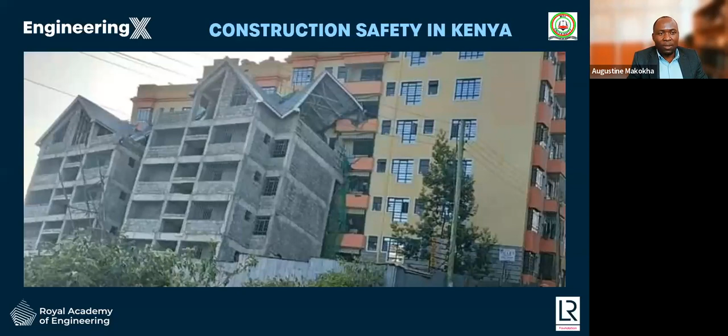Briefly, the goal of the Safety Champions in Engineering Education program is first to build capacity in terms of skills and knowledge to ensure that we have a sector which is safe, and we are targeting students, engineering students, who will become future professionals designing, maintaining, and operating our infrastructures in the industry. We are also looking at the practicing professionals, engineers, mainly for the purpose of upskilling them and reskilling them so that they're able to implement safe engineering practices in the construction industry.

And secondly, we are also trying to enhance safety awareness by advocating for enforcement of standards in the industry, and we are doing this through outreach programs. So we hope that through this, we should be able to reduce the number of accidents and fatalities that occur in our engineering construction industry.

Just to have a kind of context of this, we try to get some data from the industry to be able to understand the context of the challenge or the problem.

Looking at the growth rate, we realized that construction is one of the fastest growing sectors, having recorded about 6.3% rate of growth in the first quarter of 2024. In terms of the GDP, the sector contributed 7.1% to the GDP, and it employs approximately 400,000 people, out of which around 135,000 are skilled. The remaining are semi-skilled and unskilled.

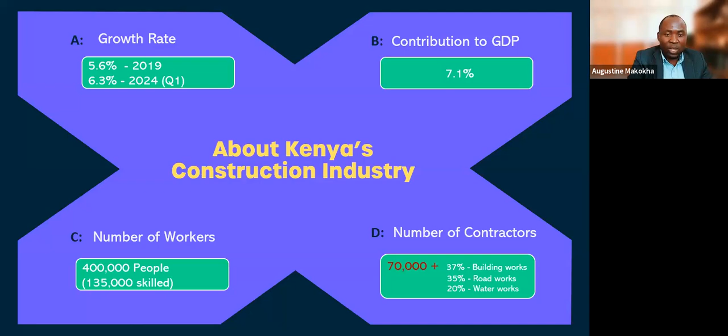The remaining about 8% are the ones in mechanical and electrical works. We also looked at the capacity in terms of the professionals that we have, and we realized that this sector is served by a range of professionals. We have engineers, architects, quantity surveyors, and physical planners, totaling about 5,000 professionals collectively.

If I look at just engineers, we have about 2,000 engineers expected to serve 70,000 plus contractors, assuming all these engineers are working in the construction sector. That translates to 1 engineer for every 35 contractors. You can see that already we are really under capacity in terms of our professionals.

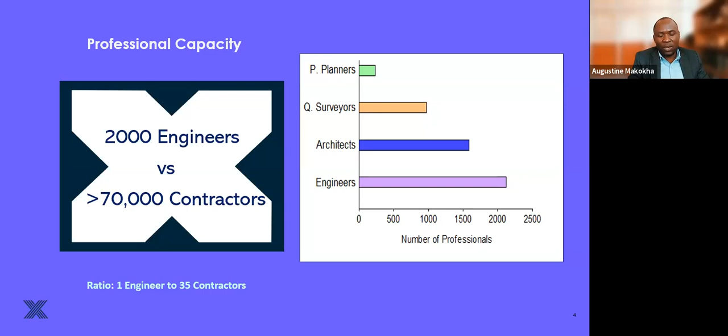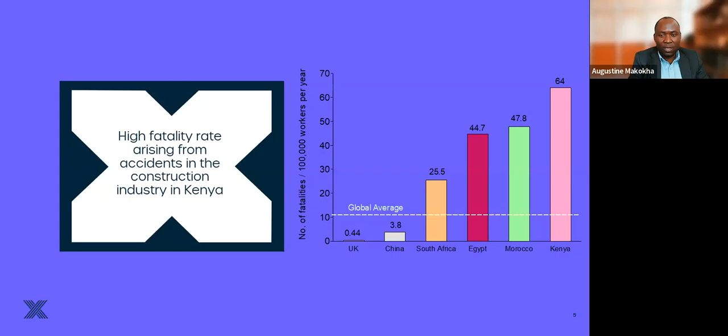This could also be a contributing factor to the low safety performance we are witnessing in our construction industry. If we look at the statistics on fatalities, Kenya has a very high rate, about 64 fatalities per 100,000 workers per year. That's higher compared to neighboring African countries like Morocco, Egypt, South Africa, and way above the global average of about 10.3. So we still need to do more to bring down this number.

We also know that safety is not only confined to the construction stage, it extends even to the stages after construction. As we can see from this data, safety risk is actually very varied.

Out of 14,895 buildings that were inspected in 2021 by the National Building Inspectorate, only 24% were declared safe. That means the remaining about 76% are actually unsafe.

And that is during the building as well as after the construction stage. We also observed that the number of buildings that collapsed during the same year were actually more after completion than during construction. That implies that even the building where you are seated, you have to be sure whether it's one of those that are safe or not, because 8 in 10 buildings are actually unsafe. That's what the statistics is telling us, and it implies that safety is really a very varied kind of risk, which can occur in many forms.

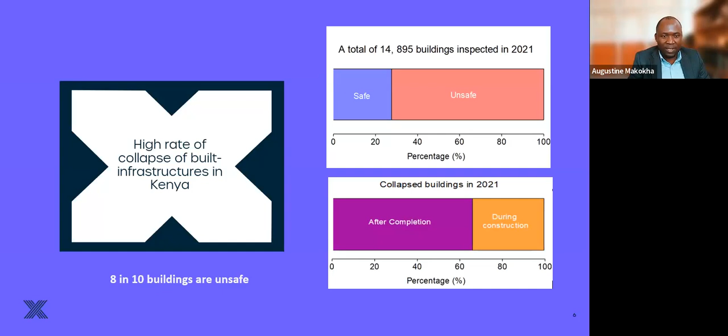Just to reiterate this, we looked at some case points to demonstrate how varied the risk is. The first case point relates to a building in Nairobi, and I think most Kenyans have seen this. This is a building that was sinking, or was partially sinking, due to some issues with the design of the foundation. We can attribute this to failure to observe building codes and standards, and maybe also non-involvement of qualified professionals in the design and supervision of some of these projects.

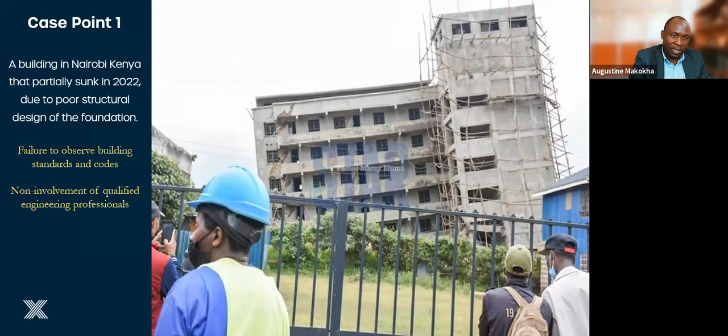The second case point relates to a bridge which collapsed in Kajiado in 2022. This occurred just 1 week after commissioning, and the reason is attributable to design deficiency of the bridge.

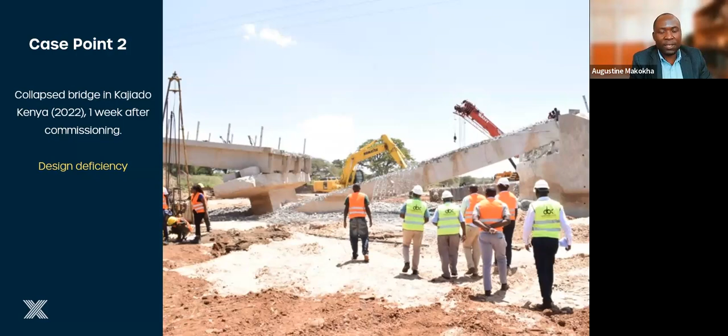The last case point relates to a construction supervisor or boss who actually fell and died while supervising or inspecting a building. We see that there was failure by the contractor to provide safe access to the construction site, which is an issue with non-compliance.

So we learn a few lessons from this. One is that safety runs all through the entire stages of the project. It's an integrated aspect in what we normally look at as a systems approach, where safety should be considered as an integral part of the entire project. Two, in terms of safety responsibilities, all the duty holders in a project should have a responsibility for safety.

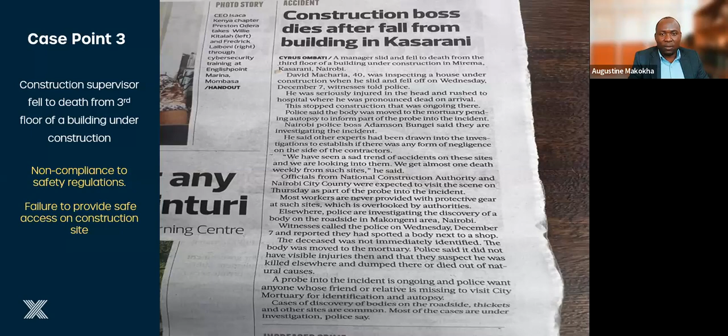Having said that, let's try to understand who is involved in ensuring that the people, the infrastructure, the environment is safe, that regulations are enforced, and that safety is improved. First of all, we have the government, which has a duty to monitor, control the quality, approve and ensure that planning is as per the standards. They do this through a number of agencies: the National Construction Authority, NEMA, DOSH, and KEBS.

All these agencies are supposed to assist the government to ensure that our infrastructure, our people, and our environment is safe as far as construction is concerned.

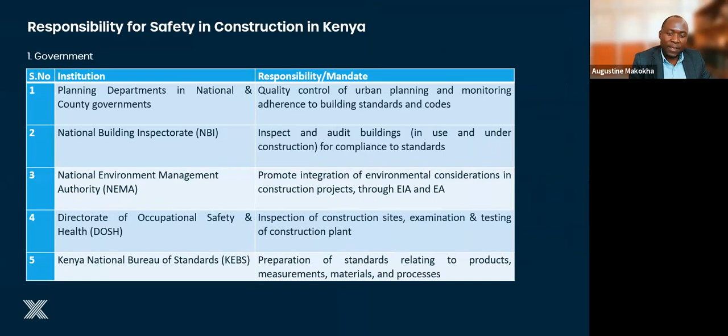The second stakeholder here is professional bodies and training institutions. Professional bodies have a duty to regulate the professionals practicing in the construction industry. Of course, they provide licensing. They also ensure that standards are adhered to, and they are supposed to contribute towards development of some of these standards and ensure that professionals uphold professional practice.

We also have universities and colleges who have a duty to train young engineers or young professionals who will be taking up these responsibilities in the future as professionals in the industry to design, to implement, to manage some of these projects. By doing so, they are supposed to be well qualified to do this in a safe manner.

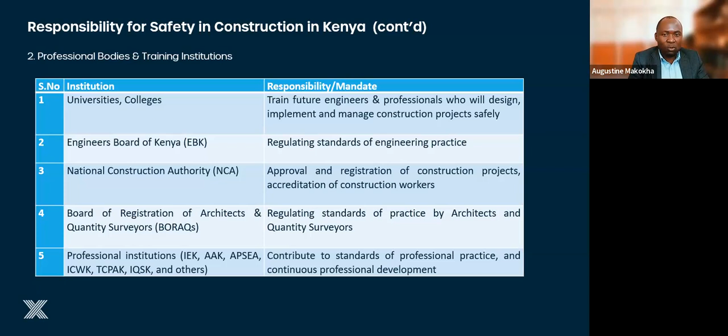We also have the industry. Of course, they have a duty in terms of compliance. They are supposed to comply to the regulations. We have the employer, who is supposed to provide the relevant information that will help the contractor come up with a safety management plan. And also we have the community that has a duty to create awareness and ensure that members in the community are sensitized about safety.

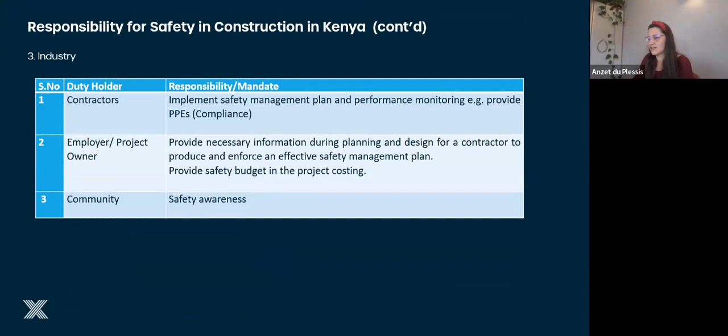Okay, sorry for that hitch. I think I'm now back. I hope you are able to see my slides. I was just trying to explain the role of the industry as far as safety is concerned.

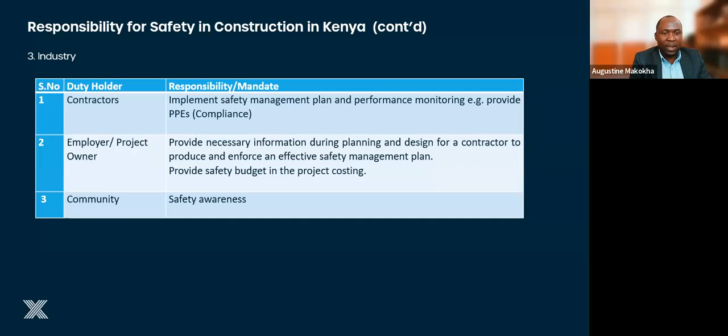Of course, the contractors have a duty in terms of ensuring compliance. The employer has a duty to provide relevant information that will assist the contractors to come up with a safety management plan. And the community is also charged with the responsibility of ensuring safety awareness and sensitization is in place. In doing so, they are guided by some policy and regulations. We have the National Housing Policy, the National Environment Management Policy, the Construction Industry Policy, all the way up to the National Occupational Safety and Health Policy. So these policies are able to assist them to implement safety management.

Now, having contextualized the context of the sector, we carried out a survey to understand the barriers to achieving safety within our construction industry. We sampled 26 counties, as you can see on the left, all the way from Turkana to Mombasa. And what came out is that there were 4 main barriers.

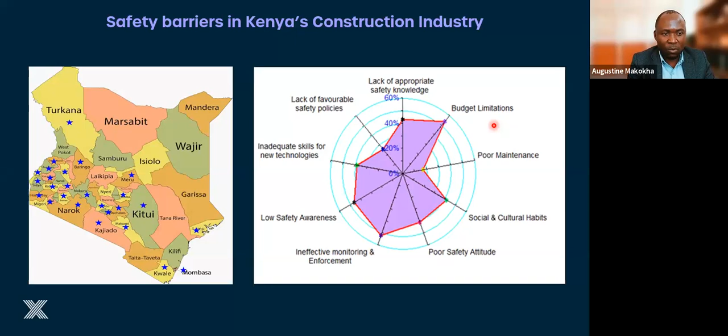There were so many kinds of factors, but 4 came out strongly as the main barriers: ineffective monitoring and enforcement, issues of safety knowledge, issues of budget limitations — meaning the provision of safety budgets was also a limitation — and safety awareness was also cited as very low within the industry.

Looking at this, it means this is a very diverse field, and to tackle this challenge will require approaching it from multiple dimensions. One of them would be through monitoring and evaluation, through capacity building, and also through enforcement. So as safety champions in engineering education, we are contributing towards tackling this challenge through a capacity building approach, and we've been able to enforce about 4 programs to build capacity.

One of them is training of trainers. Another one is graduate internship program. We've also done short courses on safety. And lastly, we are also doing some outreach and partnership programs to be able to enhance that safety awareness.

In terms of training of trainers, this program is meant to assist occupational safety and health trainers to improve their ability to effectively deliver trainings within their workplaces, within the industry or wherever they're working, and to do this effectively and impactfully. By doing so, they're able to infuse our safety culture through knowledge empowerment of the workers, through behavioral change, as well as ensuring continuous learning within those working places.

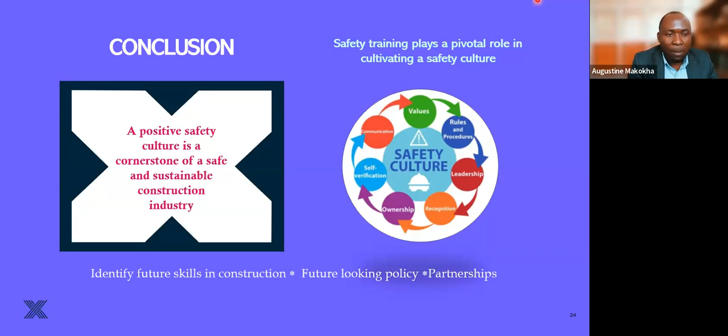We're also looking at policies. We need future-looking policies, and we need partnerships to help promote safety. As our next steps, we want to leverage the partnerships we have established with our stakeholders to scale up some of our initiatives in capacity building for safety, and carry out further engagements to improve our policy and advance our research towards achieving a safer construction industry in Kenya.